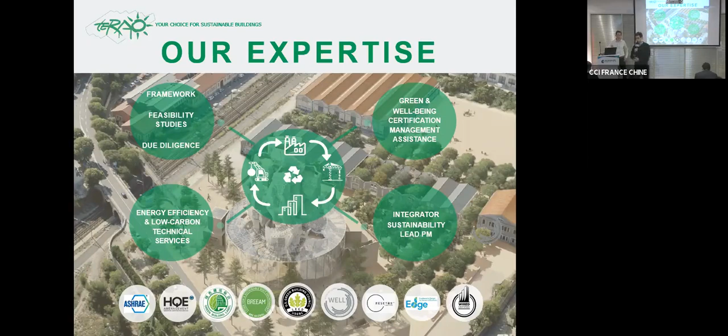We play the role of integrator of sustainability expertise on our projects, bringing in acoustic experts such as Delhomme, or solar experts.

We've identified some recent trends in China which have been promoting the sustainability topic. First, the country, China, has taken a strong stance with regards to sustainability and carbon. There is the carbon peak, which has been announced for 2030, as well as carbon neutrality by 2060. So new regulations are around the corner, and actors need to be proactive and ready to adapt to these changes. There are other topics, such as rising operational costs or difficulty to attract or retain qualified workers, and we believe that sustainability applied to factories is a way to solve these various issues.

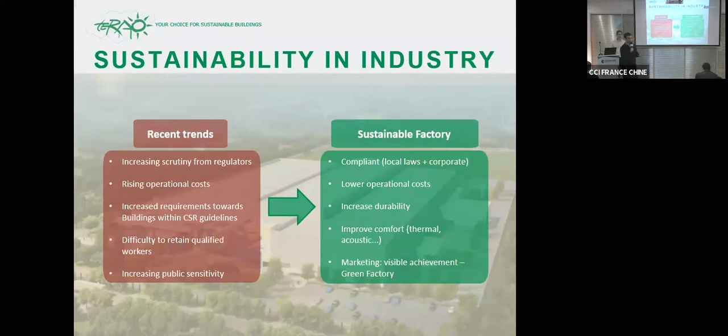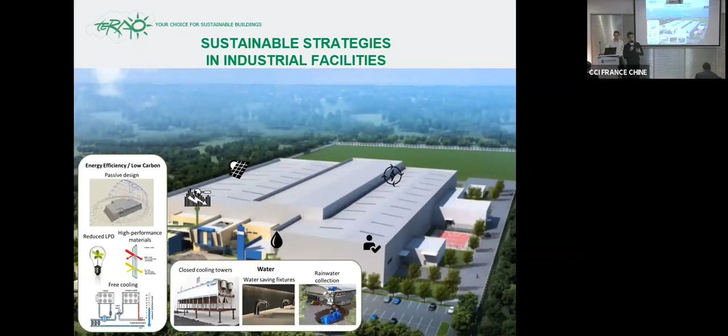If you break down sustainability applied to a building, whether it's new construction or an existing facility, you can divide it into categories such as energy efficiency and low carbon, water efficiency, health and comfort, renewable energy, and smart monitoring. We try to build all these strategies around three pillars: people, process, and product.

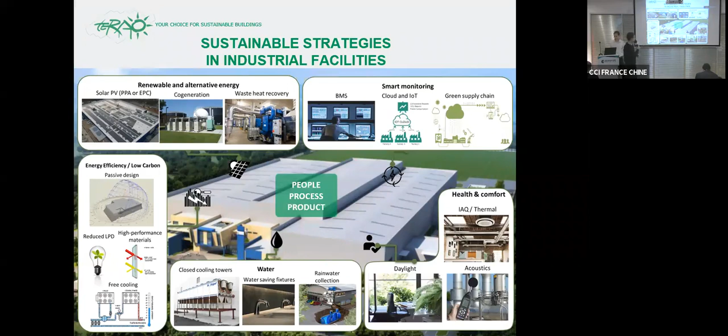Now a quick focus on existing facilities. I'm going to explain a project case we're still working on, of which we've completed the first phase. Maxime here was mostly involved. It's basically the optimization of a factory in eastern China, in Changzhou. It's a 6,000 square meter facility, and the company, a Canadian company, is in the process of negotiating the renewal of its lease with the landlord.

They've recently had some very ambitious sustainability targets at the global level, such as reducing carbon emissions by 50%, as well as increasing renewables in their energy mix. So the problem was to understand whether they could reach these targets by staying in their existing facility.

Our approach was to conduct an energy audit to understand the situation regarding their consumption. They had no sub-metering whatsoever, just the overall consumption of the asset. So the first step was to thoroughly study the process consumption and build a model of consumption based on their production information in order to calibrate an energy and thermal model.

Thanks to this model, we identified the causes for thermal gain. This company has very high standards in terms of comfort for its employees, and they were consuming a lot of energy in summer to cool down the facility. They thought the thermal gains were linked to their equipment—doing heat treatment, they have a lot of ovens.

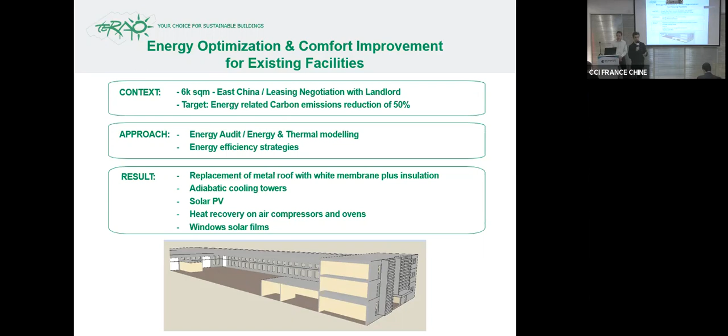Now a quick focus on carbon. You might already have some targets with regards to carbon emissions. The first thing is to understand that emissions are split into three different scopes. Scope 1 are the direct emissions, basically the emissions coming from your vehicles and facilities.

Scope 2 are the indirect emissions related to energy, such as electricity. And the third scope covers all the other indirect emissions, such as the emissions related to upstream and downstream transportation of goods or employee commuting.

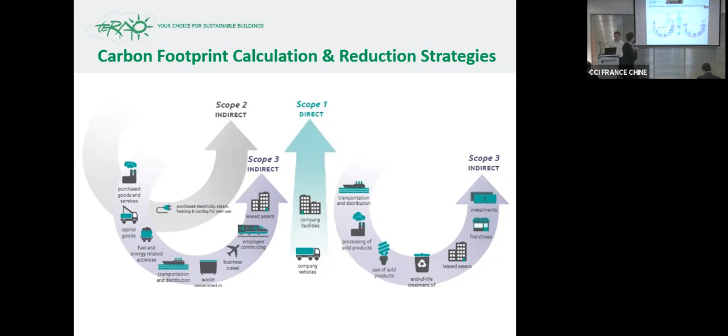This is, let's say, the standard approach if you want to reduce your carbon footprint. Raymond will introduce a very practical case in a few minutes. But basically, the idea is to first identify some targets, then define a clear perimeter—that is, do you want to focus on an asset level or a country level, for example? Do you want to cover scope 1 and 2, or also scope 3?

Once you decide on a perimeter, you move on to the calculation phase, where you identify the carbon equivalent for all your emissions. Once you have a clear understanding of the footprint, you can move on to defining an action plan to reduce your emissions, and lastly, implement the relevant strategies for your business.

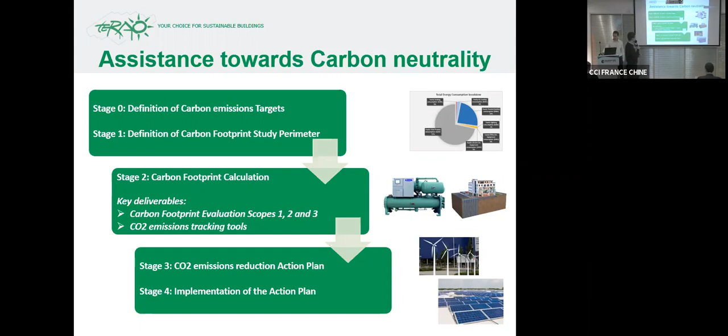A quick focus on a very typical offsetting strategy in China: solar PV, which we see a lot on industrial projects. There are two main schemes in China: EPC, engineering procurement construction, where the client invests himself in the solar PV power plant on his roof, and PPA, power purchase agreement, where the client invites a third party to invest for him, and the PPA company sells the energy at a discount compared to the grid cost.

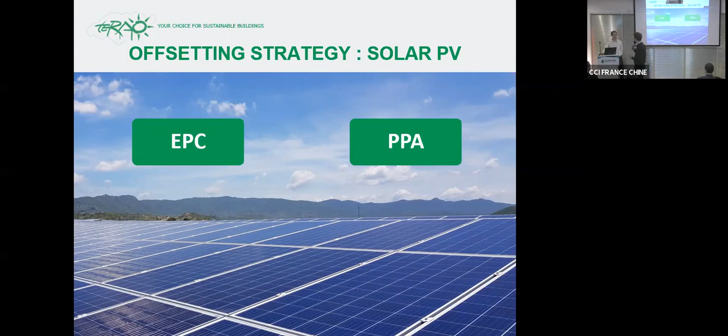Now Maxime, my colleague, will talk more about new construction.

Hi everyone. I will present a case study we have done in Kunshan. So this factory—the client came to us and said, okay, I have an issue. My design institute gave me some energy consumption figures for my factory, and I really don't want to provide HVAC, air conditioning, in my factory because it will be too expensive.

So he asked us to do energy modeling and design review to understand why it's so huge. What we found, firstly, is that the design institute doesn't correctly understand all the usage and process.

So it took some manual assembly process with plastic injection. Thermal gains were very huge in their design, so all the air conditioning system was oversized. When we did energy modeling and improved the system, we saw the system could be downsized by maybe 25%.

When we downsized the system, it's 25% direct cost savings, and also savings during operation. So what we did was give the good hypothesis to the design institute and do our energy modeling to show it was possible to have air conditioning on this factory, and it was easy to improve the energy consumption.

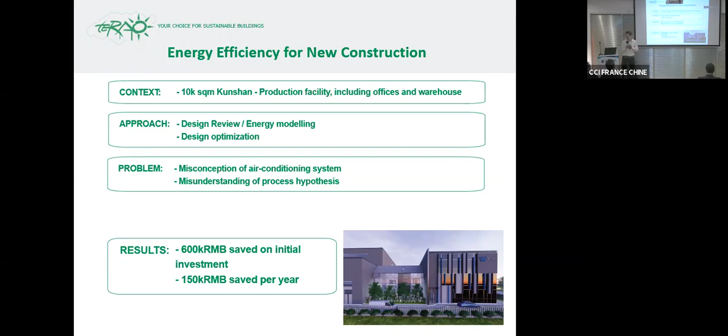On this project, at the end, because there was also an office part, they asked us to check if the canteen was comfortable or not. Because finally what they did in concept design was just draw a canteen with 100% glazing on the roof and on the wall. But when we did simulation, we saw it's just not possible to have a comfortable space. The thermal comfort of this space, just to give you an idea, if you go inside during summer, it's 35 degrees feeling temperature.

So during detail design, they did nothing. And it's why at the end of detail design, we came to support them, saying okay, what you can do for this canteen before the end of construction, you have three choices. The first one is to put blinds. And what we showed them was, okay, blinds are possible, but for maintenance and thermal comfort, it will not be good enough.

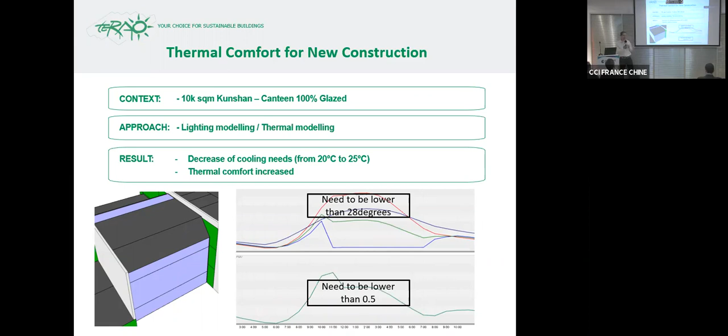The second choice was expensive - just to have some windows but changing colors. But this one was too expensive, they didn't accept. So the last choice, we decided together with Delhomme Acoustic and French House, was to change the roof to add more thermal comfort, block the sun rays, and finally get thermal comfort and also acoustic improvement. So now this solution has been put in place and the canteen will be comfortable.

About a low carbon approach in a factory, you have two topics. The first one is embodied carbon, and the second one is operational carbon - during operation, the energy consumption produced by your building.

For the embodied carbon, first, it's material. When you build a building, you will create a lot of carbon because of the materials created. So the idea is to find materials which won't create so much carbon in the atmosphere - for example, prefabricated concrete, lightweight concrete, or recycled metals. Each time in a factory these will be the two main factors of emission, and you can reduce it very easily, but you just need to suggest this solution.

The second one is related to transportation and sourcing, so all the supply chain, whether you have local suppliers or not. The third one is about energy use during construction - for example, try to have good equipment on site when building your factory. The fourth one is about the waste generated on site - you can reuse some packaging, give back to your supplier, and also reuse the earth you have excavated. So there are many different solutions.

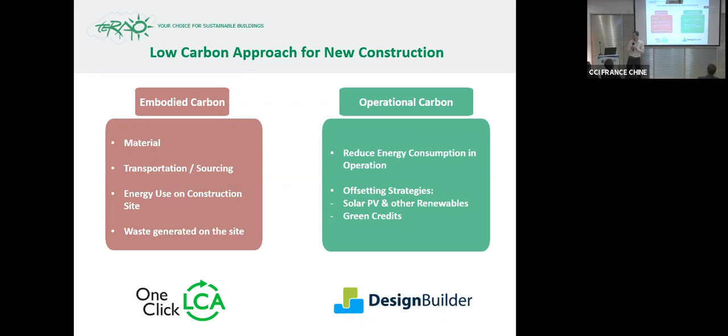If you're asking how to start your project, basically the first step is more linked to the feasibility study or an energy audit. So based on my current design, based on my current project, what can I do? That's the first step. Thanks to this first step, you can get some sustainable design brief, some clear guidelines, and you can move forward.

So what we generally do is some design review and create a sustainability roadmap. That's very important for you at the beginning - feasibility, gap analysis, energy audit to have a sustainability roadmap. Based on this, you can start your sustainable factory.

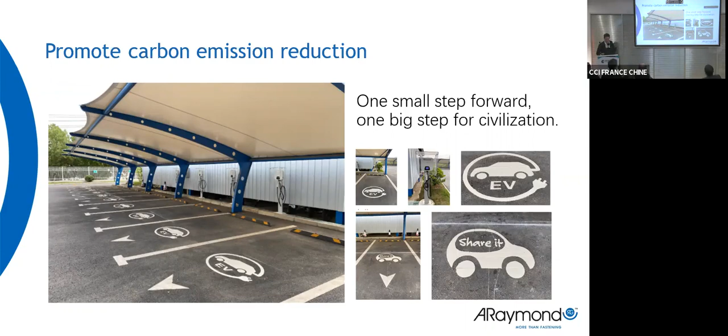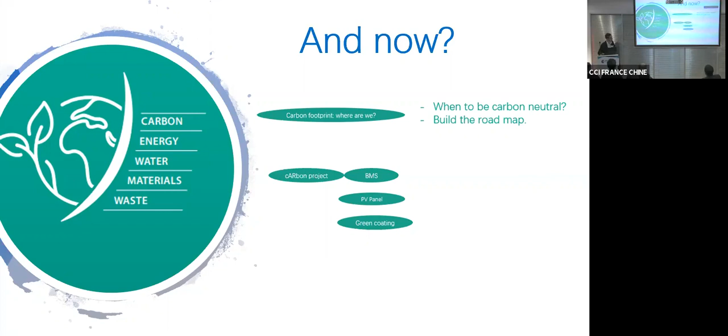Now, this is what we have already done. Coming back to our CSR pillar about planet and carbon footprint - where are we, and when could we become carbon neutral, building the roadmap to achieve this target? Other projects linked to energy efficiency include energy optimization, carbon and building monitoring systems, photovoltaic, and a green coating line - a new project with a low consumption coating line.

For carbon China footprint, we work with Terao. Today we are in what we can say is three phases.

The first phase is carbon footprint measurement. We are currently in this step, and it's planned before summer to have the carbon emission from scope 1 to scope 2, and in parallel to start the low carbon strategy, meaning when we could achieve carbon neutrality - 2030, 2040, 2050. This will be one of the targets, and then to build the roadmap.

And after, the last phase is low carbon strategy deployment according to the roadmap we built.

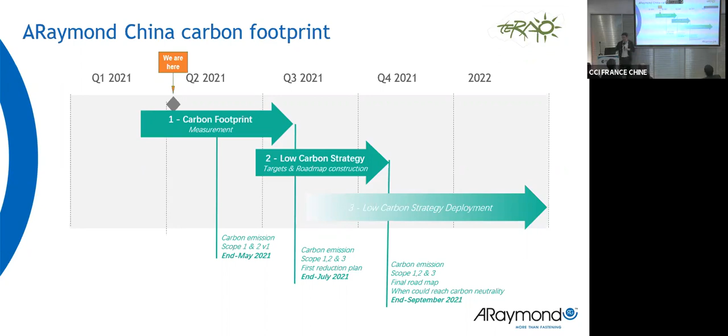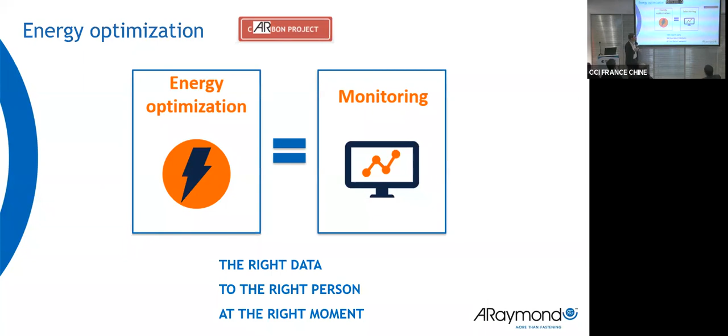So the second one is our carbon project: energy optimization, monitoring. It's getting the right data to the right person at the right moment. For this, we have two focuses. One is about buildings, meaning implementing a monitoring system to optimize the energy consumption of the building.

Here there are two things: one by automation, by sensor, where something will be automatically adjusted. And the other by providing information to people so they can themselves take the right action, the right decision - coming back to the right data at the right people at the right moment.

And the second one is equipment monitoring system. At the moment, we did it in one plant in the world - an Indian plant, a pilot plant - and it's not complete, it's step by step.

But they already did it for some utilities and for the injection machines, and the operators get the information and can optimize. They even had some challenges between different teams on which team had the best energy savings during the week. This project, as a pilot, the Indian plant has finished the first phase, and China will follow.

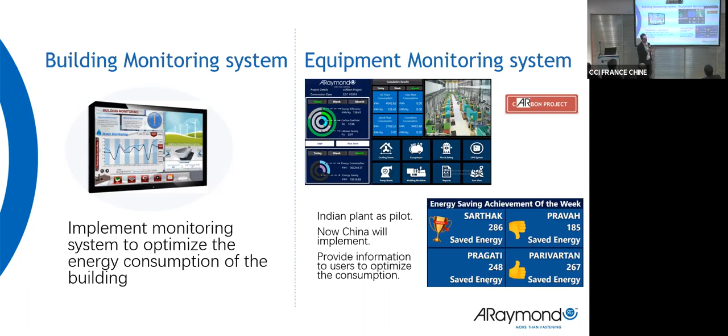Sorry for the 10 minutes. Almost finished.

Green energy - the other way is also to reduce purchased energy. And it's why we already installed some, but now we'll install more photovoltaic panels on all the roofs where the structure can allow this.

Just to finish and answer the question of this evening: how to reduce factory impact on the environment. It starts with 3 points: knowing where you are, which we do through the carbon footprint; establishing the long-term strategy; and at the end, involving the entire organization. It's not just top management, not just a few people - it must be everybody if you want to achieve it. It's obvious, but it's key, it's a key base.

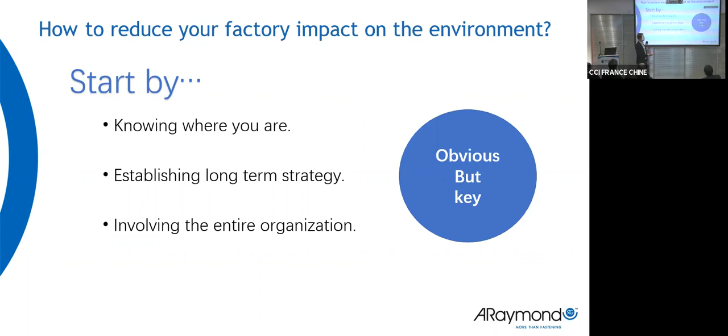And thank you, and no question, if there's any question.

Just one quick question. How is your solar panel energy managed - is it third party or do you use it directly? We use it directly.

And what about your plastic material? You're an injection facility, right? Yes. So what about material - recycling, treatment, using? Recycling, and we are working on some new material, meaning greener material. It cannot be for all products, but for some new products we're working on this kind of material.

But you also recycle - you're working on material you use at your factory, but what about collecting and recycling? You have a recycling facility also? For our material, we recycle in a closed cycle, and for some of our activities, because we have several activities, we use rebranded material, meaning we recycle material from outside. Do you sell material? No, we don't sell.

Delhomme Acoustic is a French acoustic consultancy company. It was founded in 1995 by Jean-Philippe Delhomme. We have offices in France, in Toulouse and Paris, and offices in Asia, in Shanghai and Ho Chi Minh. The company is mainly composed of acoustic engineers, and we have already completed about 8,000 projects around the world. We have our own R&D department, which allows us to develop our own tools.

Our field of expertise is very wide. We worked for architectural and interior design projects, so for buildings. We also have a lot of projects in industry, controlling the noise for factories and workshops, and also environmental projects regarding town planning and urbanism, but also wind farms. This is a wide panel of the clients we work with.

About noise pollution in the industry, we can split it into two main noise issues. I would say we have the environmental noise issues, regarding the noise induced by the activity of the factory. But we also have the noise induced within the workshops, with all the technical installations of production that can induce noise for your employees.

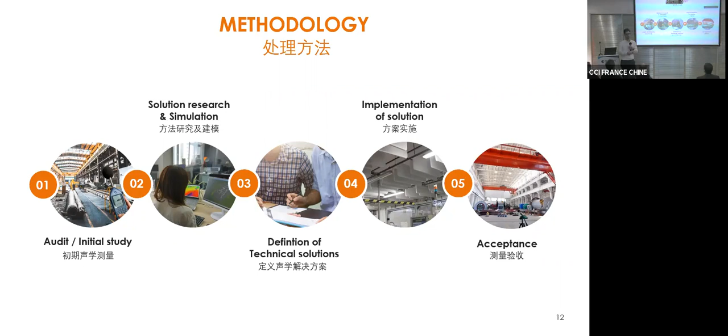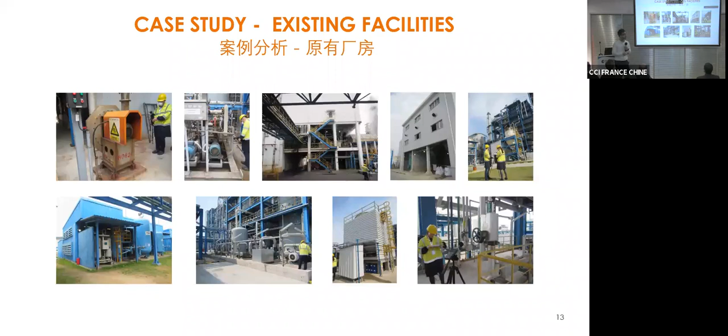So I will give you an example of a case study. We worked for a factory in Shanghai who had noise trouble with their activities. This client had years of non-compliance with the local regulation. Every year they had extra taxes and fines due to the non-compliance of this project. And they were spending money every year on a useless solution, because they were looking for products to improve the situation.

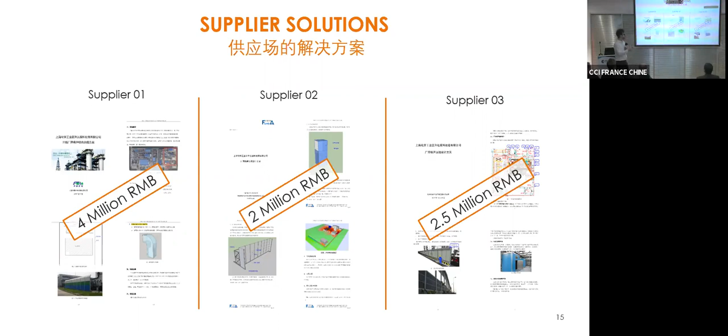So they came to us a few years ago and asked us to analyze three different supplier solutions. They provided us the specification of treatment they wanted to apply to solve the issue, and our job was to look at each solution and check which one was the best.

Before this, we went on site and started with the audit. We checked the multiple noise sources located in the project. This project is very, very big, very wide, so we had to go through a deep analysis and characterize and locate the various noise sources of this project: technical installation, specific equipment, sound leakage, everything.

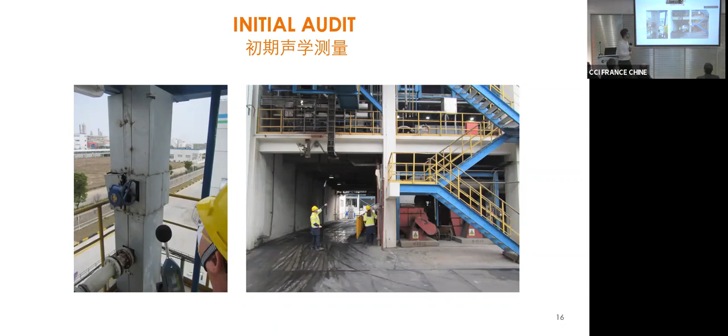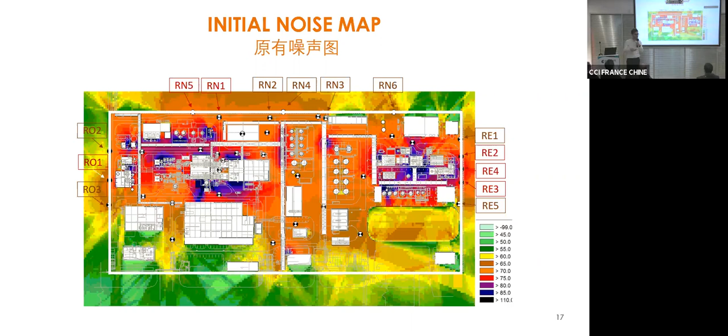What the supplier defined was a treatment able to satisfy 50 dB at the boundary limit. So the conclusion was that we had over-treated the area. The treatment applied was good, but we treated too much, so maybe the investment was too important for this.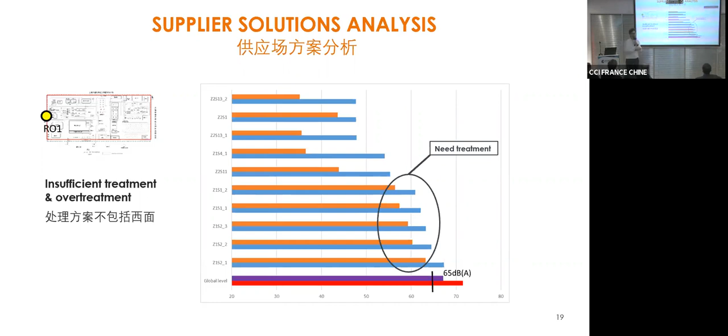So the client was investing on something that would lead to non-compliance. In the end, there was no solution provided by any supplier able to comply with the regulation, so we defined a specific solution on various noise sources and also at the boundary limit.

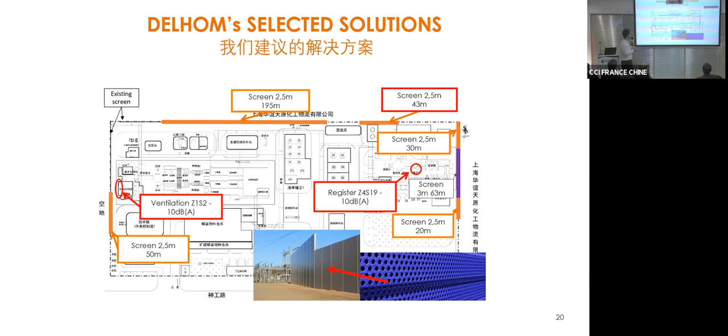As you can see in a few examples, there were enclosures for specific noise sources, integration of silencers to control the influence of ventilation noise or fans, and integration of screens at various heights to make sure we could comply with the noise regulation.

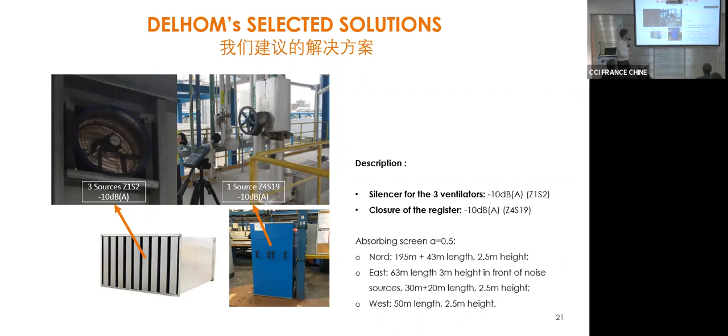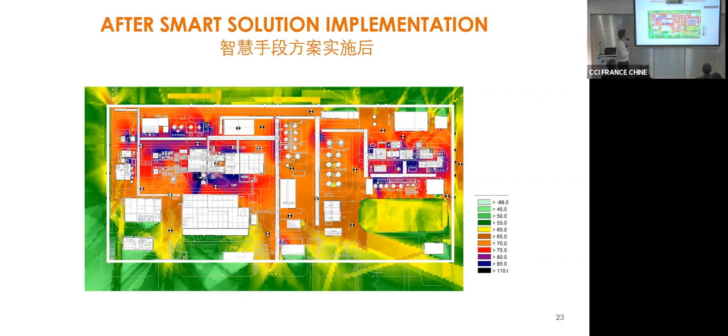This was, as a reminder, the situation before implementation of treatment, and this was the simulated solution after the integration of treatment. So we were able to check at the boundary limit if we were in compliance with the Chinese regulation.

At the end of the project, when the client decided to invest in the solutions, we came on site and ran an audit after integration of the solution. We were able to check the various receptors for noise induced by the equipment, and all the points checked were in compliance with the acoustic target.

To sum up, and be very clear: our acoustic study cost 100,000 RMB. The implementation cost was less than 1 million renminbi. By working with us and paying attention to the right selection of acoustic solutions, and ensuring a sufficient amount of treatment, we were able to satisfy compliance with the regulation within a global envelope of 1 million renminbi.

That means at minimum we saved 1 million renminbi for our client, instead of investing in a solution of 2 million renminbi that was not sufficient for the project.

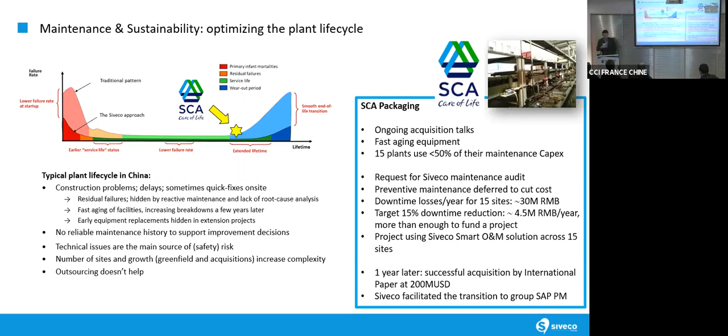What are we talking about? We're talking about regular inspections, proper maintenance, monitoring what you do and the impact in terms of energy. It's not just monitoring how much energy you spend, it's looking at what people do, what preventive maintenance is done, when it's done. This is normally not monitored. Everybody's talking about IoT, having sensors everywhere and a beautiful dashboard, but that will not measure what people actually do. That's the missing part. By working on this, we can achieve good results.

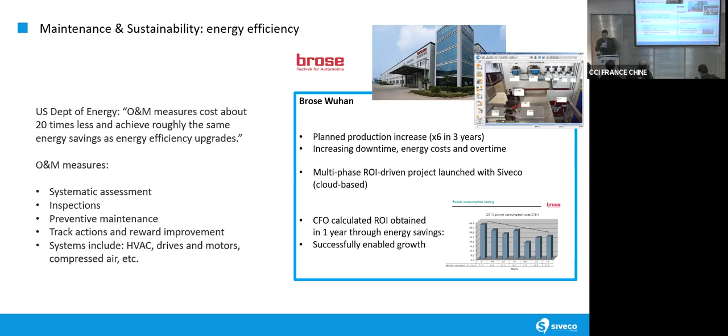We looked at this topic and designed a project based on how to ensure water quality. There's many things that are totally not my business, but in terms of maintenance and technical management, we defined a project based on achieving water quality and demonstrating to the authorities that they were doing things to ensure it. They used this a lot to demonstrate to their stakeholders, the municipal government and top government, that they were doing those things through very visual dashboards.

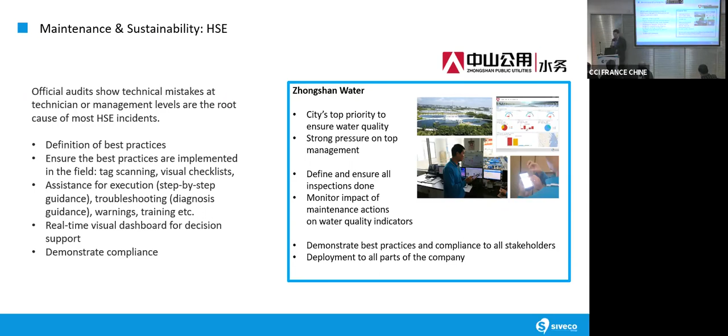That's the type of things we do, and it all starts with an audit. It could be a small audit when things are quite obvious, or it could be a major complex audit. An audit gives an independent view on the subject.

Maintenance is not a very common topic, and not many experts are available in the market, so that's our value there. The idea is to define priorities. Again, quite often it's not about maintenance—it's about environmental compliance, safety regulations, water quality, life cycle costs, and so on. But then we define an action plan, and we recommend it, and the customer, with us or without us, can then fulfill the plan.

We have lots of clients—I have over 1,000 clients, mostly in China, but also a growing business in Southeast Asia.

This was just—I forgot one thing I said. What I didn't say is, we use technology, we use IT systems for monitoring and help with execution, to structure our projects, and we use maintenance consulting services.

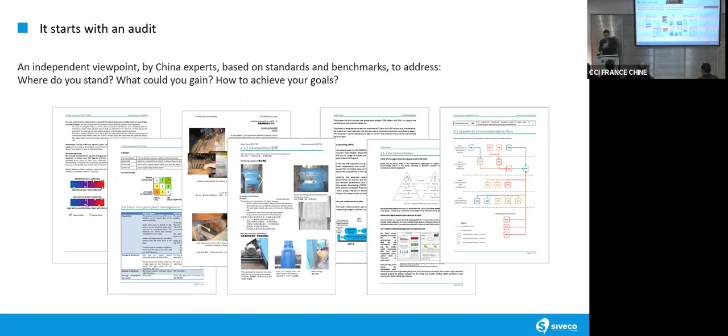When dealing with multinationals, the IT part of our scope gives trouble, because a lot of multinationals will tell us, at headquarters in Germany we use SAP, but in France we use this or whatever software—please talk to my IT department somewhere. It distracts us from the topic of maintenance. That's why quite often we start with an audit, so we don't bother people with the software. Once we identify the priorities and an action plan, then maybe using our software is part of the plan at that time. That's all for me.

So actually the ugly duckling was a beautiful swan.

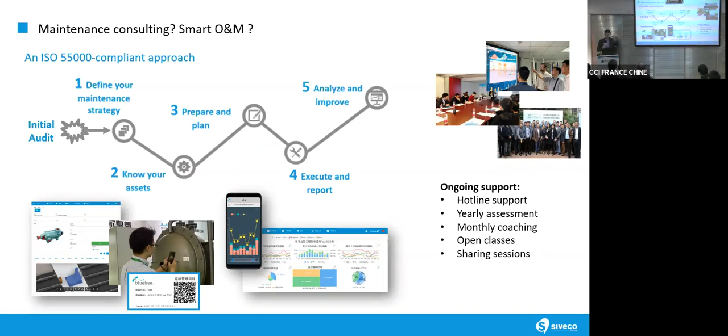You mentioned the name of our software. There's COSWIN, and something called Bluebee. Bluebee is quite popular because it's a more interesting name. It's funny that you know COSWIN - COSWIN is also famous. Bluebee, we have this little bee.

If some of you have kids in the French school or the German school, they have tags on equipment and rooms - maybe the kids know, the parents don't always notice. There's the Bluebee tag, a little bee, and a QR code. Anybody can scan and report a problem on an equipment - that's part of Bluebee.

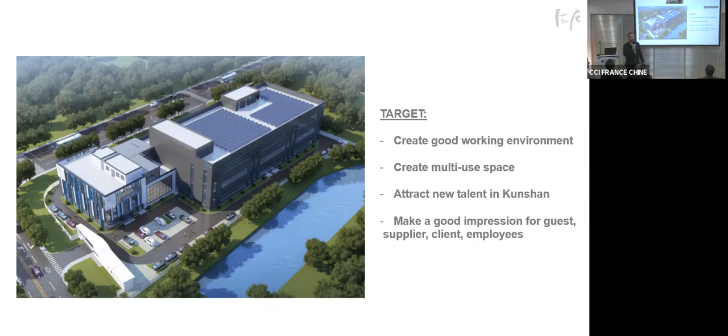So here during the design brief, we defined a ratio of playing room and sleeping room, many public spaces to create a good environment for everyone.

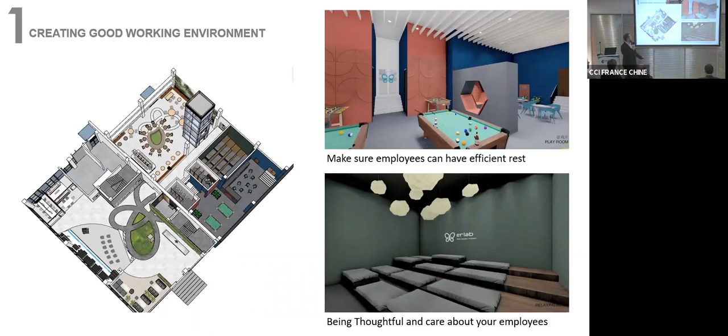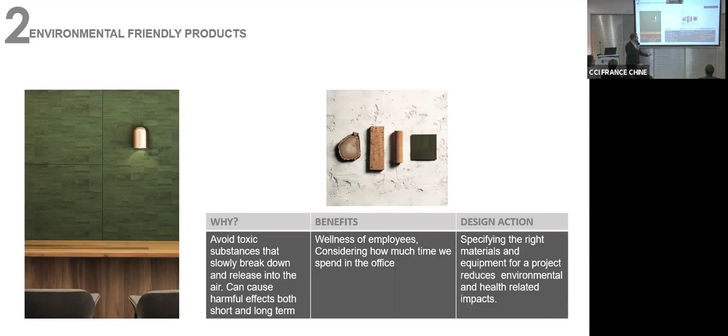This is also part of the question today: how can we be sure we are using sustainable material. For that we are checking all the testing reports, the VOC testing reports, the certificates, samples, and everything.

So if I take as example Interface, it's an American brand, but they produce their carpet in China. If it's a renovation, they take the old carpets and recycle everything in their factory. They follow the American standards for quality, so it's very short pile, no bacteria. They have all the testing reports, and they have a nice showroom in Shanghai. So this is what we try to do, to work mainly as much as possible with local products, with high-end specification.

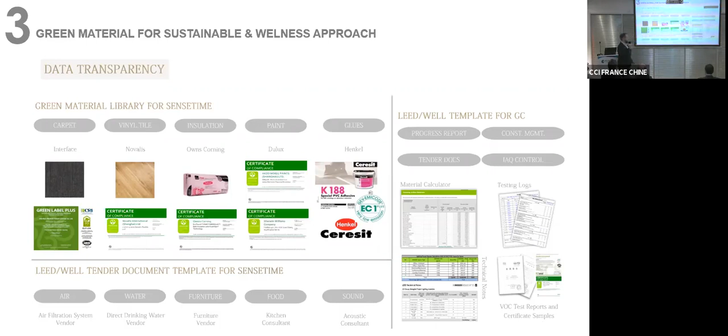Another important trend is the ecosystem application. So what I call ecosystem is to give some flexibility to the employees. How we give flexibility is now all companies try to encourage people to share, to collaborate, to have a brainstorming. So the layout is not very traditional as before, it's less classic.

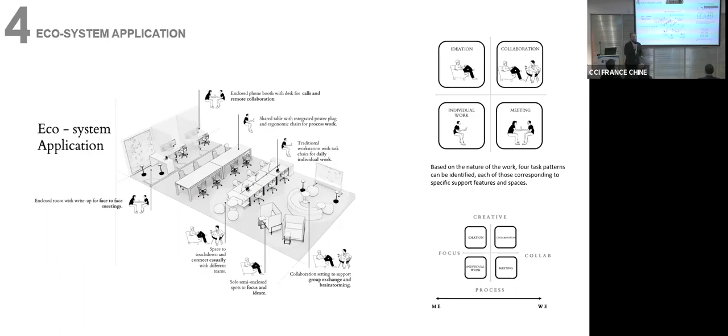So with this kind of layout, we define what we call task patterns that can be identified: ideation, collaboration, individual work, and meeting. So we try to combine all of them to satisfy everyone and give flexibility as much as possible.

So this is another case study from another client. This client's main constraint was the space. He doesn't want to give too much space to the office, but to keep as much as possible the production area as big as possible, and yet he wants to be able to welcome clients and do some events.

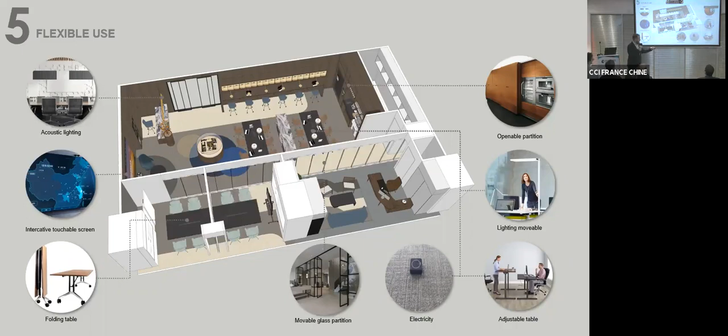So everything must be movable and flexible, but of course with still some acoustic high requirement, and some modern touch like the smart screen. So all the acoustic treatment was incorporated in the design, and movable glass partition, electricity. So when they remove the workstation in the middle, you just unplug this and you have a small slot in the floor, and everything is clean. You don't have any electrical sockets on the floor, some flexibility and new sustainability.

I will talk in detail just after.

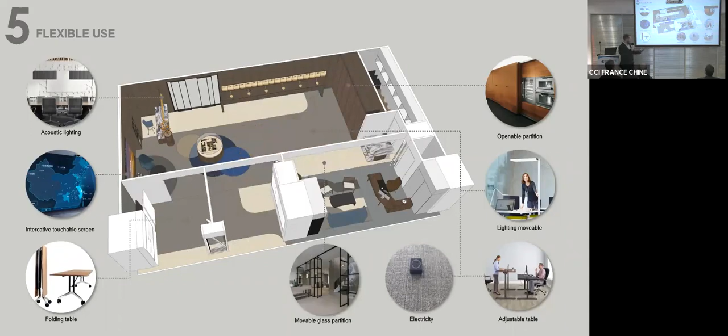So about the wellness, a previous colleague talked about the reutilization of rain water, and inside for the interior design, we will care more about the sanitary ware, which equipment we will use, providing water dispensers for all employees, clean water, energy saving as well. So how we save energy.

This is with a lot of equipment which can be incorporated and designed during the detailed design phase, such as motion sensors and daylight sensors. So it's not only about energy saving, but it's also about efficiency. Like Terao said, sometimes even if you have very expensive equipment, it doesn't mean it's well calculated.

Also the green resources, as I discussed before, the reutilization of furniture, the recycled products, and the indoor environment. So indoor, it's not only thermal comfort, it's also lighting comfort and sound.

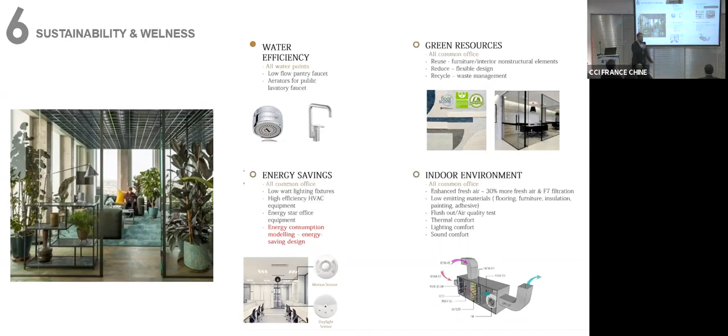So regarding the wellness practice, it's linked a little bit with LEED and sustainability, but more focus on the wellness of the employee and all the staff. So provide good air quality and provide monitoring as well to show everyone the air quality inside, to feel safe.

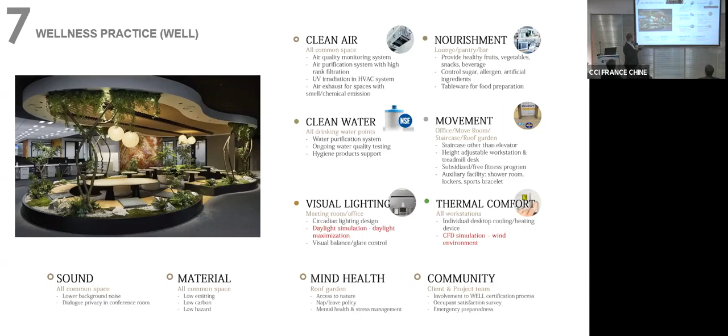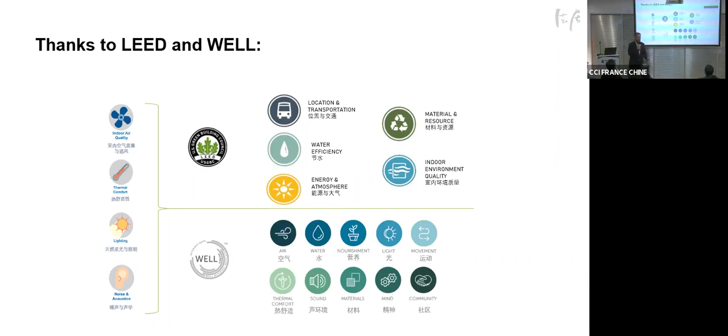So for that, I think we mainly use LEED and WELL, which is a kind of roadmap for us to do the design and also to follow up until the commissioning. LEED and WELL gave the main criteria to ensure the sustainability is good enough and high enough to provide a good working environment.

This is a focus on operation and behavior. I think only the design is not working, only the behavior of the people is not working - operation as well, so we have to combine all of them. This is what we do during the design stage - a lot of exchange and understanding of the needs from the client, and also understanding what the client is doing and what we can do to ensure everyone is happy.

To conclude, I think the sustainability, mainly for the interior design and for all the previous speakers - we save energy. If we save energy, we save money, we save the planet, and we make people happier, healthier, and more productive. So everybody will benefit. Thank you.